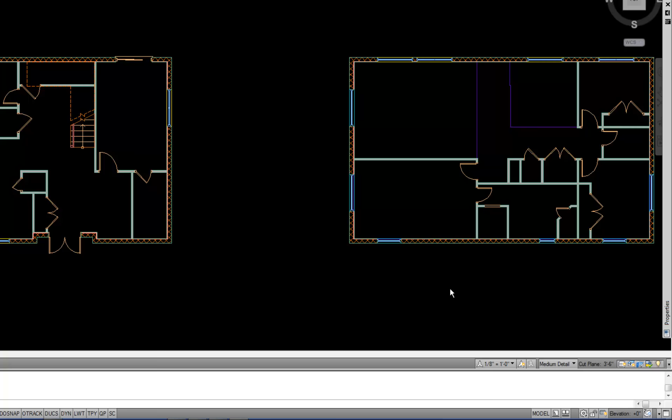You'll notice at your lower right that you have a button that says Medium Detail by default. It might say something else if you've changed that, and it will also depend on which file you're currently in. For example, if you have an older CAD file that was created in vanilla AutoCAD, and then you bring that into AutoCAD Architecture, then it's not going to say Medium Detail because those display configurations are not set up in that file. So if you're going to be using display configurations, it's always important to create your file using a template that was designed for AutoCAD Architecture from the start.

For example, when you look at your templates, you would normally want to use an AEC Model CTB or STB template when you're working in AutoCAD Architecture for a model file that you're going to use to draw your building in. If you have an older CAD file that you want to use display configurations with, you can create a new file in AutoCAD Architecture and then bring your objects into that through copy paste or the insert command, to bring your file up to the current template type.

When you hit your display configuration button, you'll notice that you have about 10 or a dozen choices of default display configurations that will help you get started. It's a great thing to use those as a starting point because you're not creating something from scratch. You don't have to reinvent the wheel. A lot of times these will do something close to what you already want.

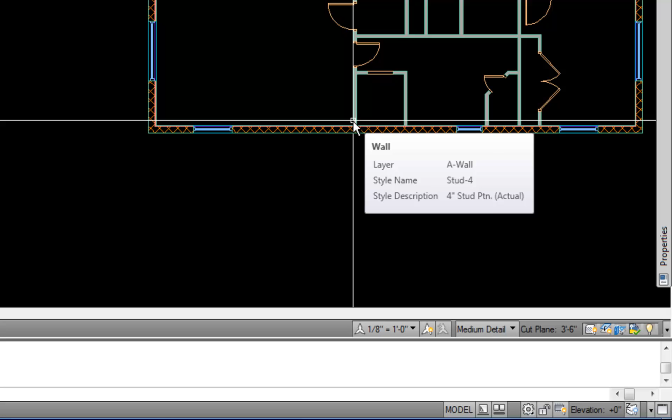The other thing that's important is immediately to the right of that button, your cut plane height, which indicates the height in the Z direction of where your floor plan view is being cut. So right now, the plan view that I'm looking at is cut 3'6" above the Z height of 0. So now let's talk about what display configurations are and how we customize them. Let me show you a quick example of what this will do if I change this setting, and that'll help you get the idea of what these are for.

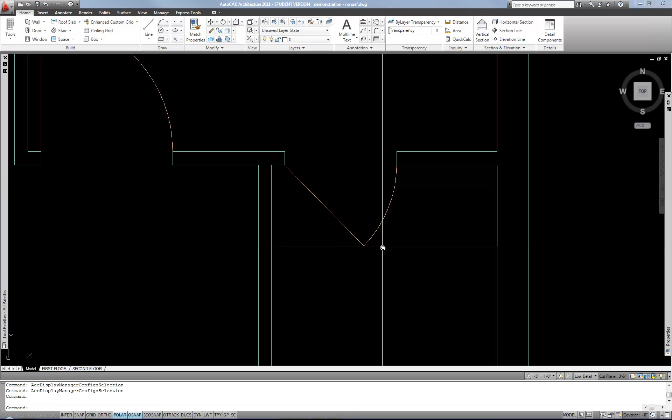If I change from medium detail to low detail, you'll notice that everything is shown in a more simple way. For example, I lose the hatch in the walls. I lose the multiple components. This used to be a block wall that had furring and gypsum board on it, but now it's only showing as two simple lines. So there's very little detail. The doors are very simple: just a single line and an arc for the swing. The stair is more simple. It doesn't show the railing except for that one line. So it simplifies the drawing to a much greater extent.

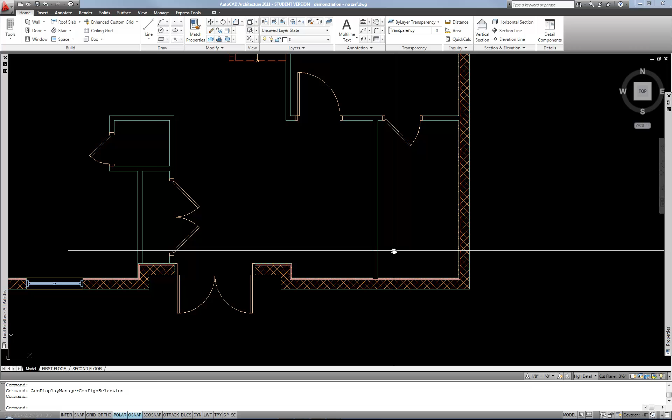Medium detail was where I was earlier. That's your normal. And then you also have high detail. When you're in high detail, you'll notice that it is showing more hatch patterns in the components of your wall, and the hatch within the walls is a smaller scale. I'm seeing more detail on the staircase. So that's customizing the display of your objects, and that's what the system is all about.

It allows you to take a three-dimensional model and extract different views like plans, sections, elevations, and other views from the model. So it really goes back to the whole concept of what building information modeling is all about. The challenge is, if you're going to use this to really dive into building information modeling 100%, then everything in your project has to be an AEC object or a multi-view block reference.

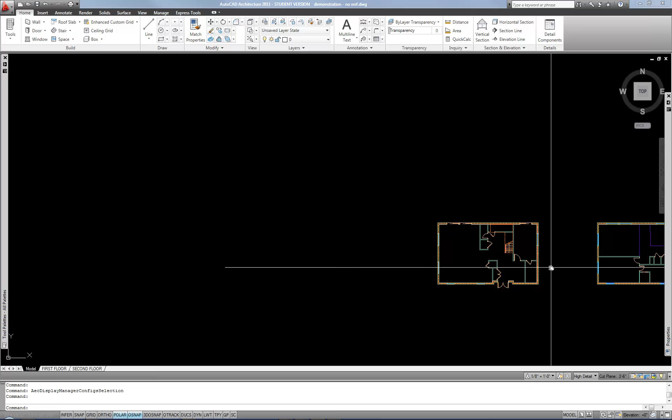So if I wanted to draw my kitchen counters here, I can't just draw lines. I mean, I could, and I could use them for my plans, but if I wanted to stack the two stories of this building one on top of the other, and then pull out the second floor plan and the first floor plan separately, like you really would want to do in BIM, then those lines are not going to turn on or off automatically through my display configuration.

So then I end up fiddling with layers and display configurations, or you're kind of just losing out on a lot of the benefit. So then you really dive into using AEC objects and multi-view block references 100% if you really want to use AutoCAD Architecture for BIM. It's not an easy thing to do it 100% all the way. And I'll get into that a little bit more in a few minutes.

Let me just flip through a couple more of these display configurations to show you kind of what they do. I'm going to go to presentation, and now it's showing kind of a medium level of detail, but it's showing a consistent hatch pattern throughout all the walls. And that's nice if you're doing a schematic design presentation because you don't want to be distracted by what is the construction of this wall versus that wall. You just want to show the layout of the rooms, the general space plan, and how the arrangement of the rooms is working. So presentation is kind of good for that purpose.

Then the next one we have is reflected, which is more for reflected ceiling plans. So you'll notice that it's turned off the doors. If I had a ceiling drawn, it would now be showing up. So that's what reflected is kind of intended to be for.

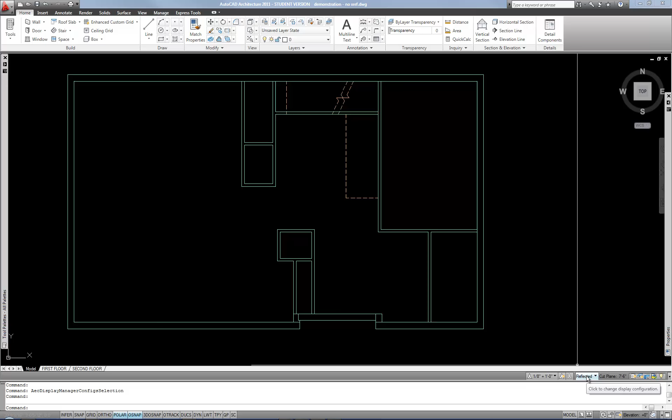You also have screened ones, which you'll notice will screen out or grayscale everything. So this would be great if you were doing maybe a mechanical engineering drawing of the HVAC system or something along those lines, and you wanted to emphasize certain things. Or you could do this for a life safety plan because you're trying to emphasize where the fire rated walls are, so you could have everything else screened except for fire rated walls and travel distances, fire extinguishers, exit signs, those types of things. So that's what this system is all about, is to automatically change the display of the AEC objects between different preset configurations. That's what the basic concept is.

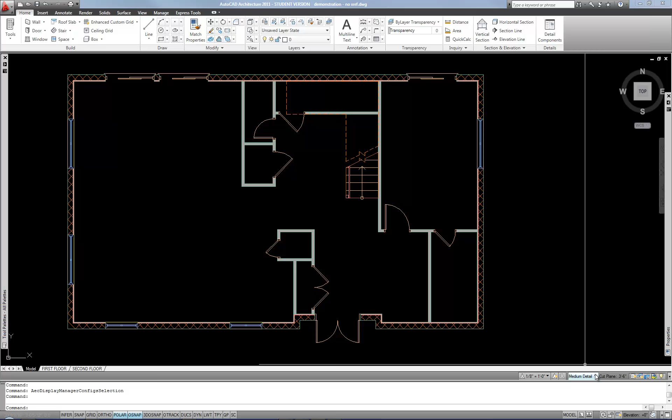So I'm going to go back to medium detail. That's always kind of my default one because I usually use that for floor plans. So now, how do we tweak some of the settings for those and talk about how those are made up? I'm going to go to the Manage tab on the ribbon, and then I have a Display Manager button on that tab, Display Manager. So this is where you get into the nitty-gritty details of how those configurations are being used, and I can tweak some settings now.

You'll notice when you're in the Display Manager that you have 3 folders on the left side that you can expand with the little pluses. So the first option is configurations, and those are simply the choices that you have down there on that button that I was just hitting. It's showing medium detail as bold because that's the currently applied configuration that I have in my drawing. If I click on that, on the right side here, you can see how it has top view, bottom view, left view, right view, etc.

Each of those is pulling a specific group of settings to apply based upon my view direction. So when I'm in the top view, which is my normal view for a floor plan, it's pulling the settings for what everything should look like from a display representation set called plan. Now when I'm in bottom view, it's pulling a different display representation set, and that's plan diagnostic. Left, right, front, and back are all using the same section elevation one, and then the default view direction, which means really anything other than that, like an isometric view, would pull the model display representation set. So there's 4 different representation sets that are being merged together into this one configuration.

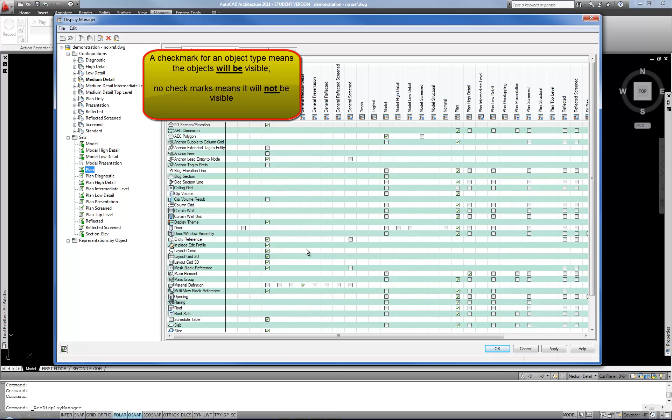So let's say I look at walls, there's one check there, and if I go up to the top, you can see that that says plan. So what that means is, for my walls, there's a display representation setting that has been set up for plan views, and then if you want them to be turned on, in other words visible, then that check needs to stay checked down there under plan and to the right of walls.

So the most important thing that you'll do here occasionally is turn something on or off. An example of that would be the ceiling grid. Remember earlier I said that there was the reflected display configuration, which is used for ceiling plans. So you'll notice when I look at the ceiling grid row, everything is not checked, because the ceiling grid would normally be turned off when I'm in medium detail, because medium detail would be

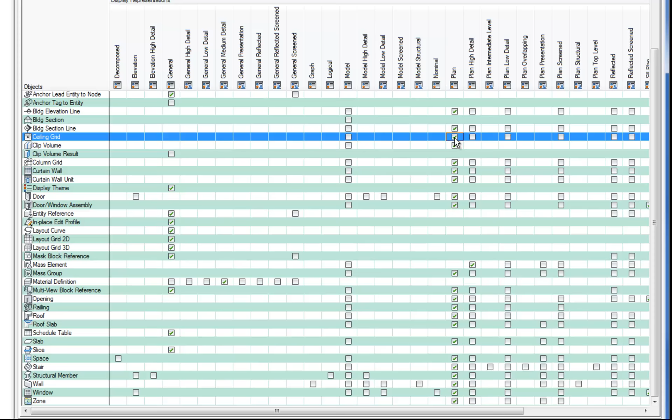more for floor plans. If I did not want to rely on my display configuration for getting a ceiling plan, then I would want the ceiling grid to actually be turned on when I'm in medium detail mode. So in that case, I could put a check there next to ceiling grid under plan, and that would turn on my ceiling grid so that I could work with a ceiling plan while I was still in medium detail mode.

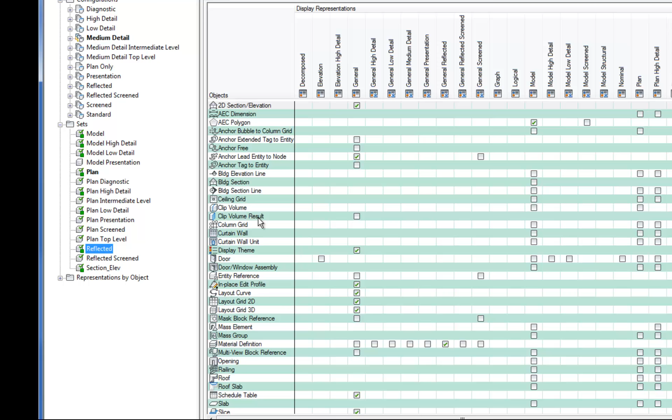Now, if I don't want to do that and I want to use it more the way that AutoCAD intends us to, then I can go down to Reflected on the display configuration, look at top view, and you can see that it's the reflected display representation set. So now I'm going to go down to Reflected under my sets and look at the ceiling grid again. As you go over to the right, you can see that there's a reflected setting that's checked. So that's going to turn the ceiling grid on when I'm in my reflected display configuration.

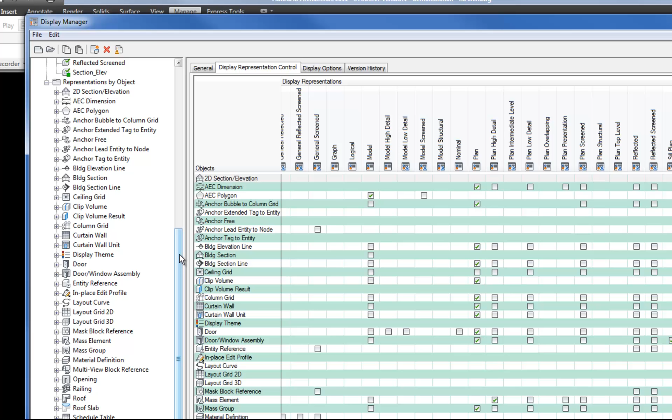So now let's look at the third section here on the left side. So we had configurations, which again is pulling one for each view angle, like top view. And then this is what it's actually pulling in terms of turning things on and off in terms of visibility. Now, what does that mean? So now I'm going to go to the object types, and that's the third level. So we're digging down into the deepest level of the hierarchy here.

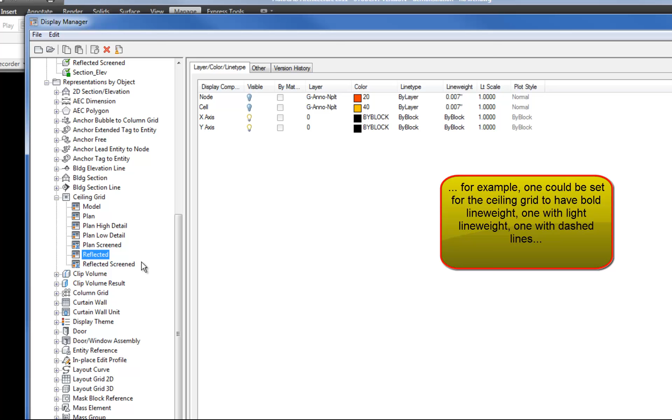So now if I go to ceiling grid and reflected, under ceiling grid there's looks like 7 different options for how the ceiling grid is going to be shown. That's what these are, the representations for each type of object. So under ceiling grid I have model, plan, plan high detail, low detail, plan screened, reflected, and reflected screened. Those are just different options for how the ceiling grid could show up. And then I could tweak each one of those a little differently if I wanted.

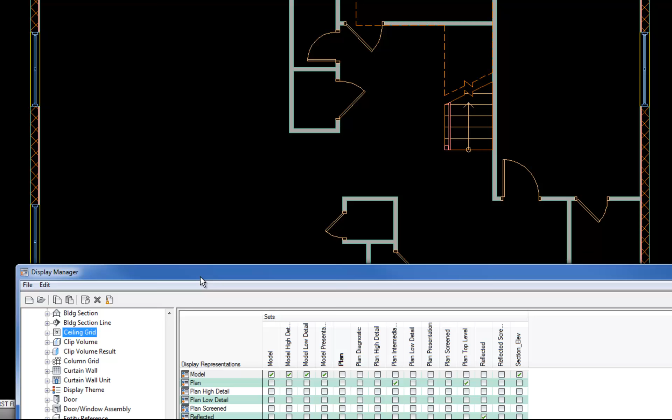So let me show you some examples so that this will be a little bit easier to understand. Let me go back down to the walls here under my objects. Remember when I changed the display configuration to presentation, it made all the walls a solid orange hatch. So let me show you where that's coming from. If I go back up to my presentation configuration, I can see when I'm in top view, it's using the plan presentation display representation set.

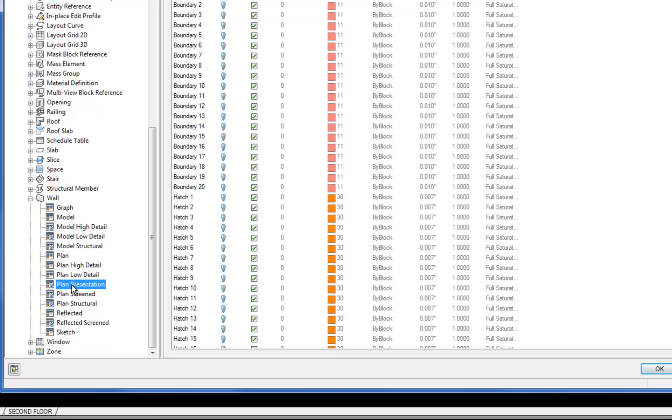So now I'm going to go down to the bottom, my plan presentation representation of the wall. When I select that on the right side, this is my graphical control for how the walls would look when I'm in that presentation display configuration. I have the hatching tab, and you can see there's a shrink wrap hatch solid pattern being applied. So that's why it was solid orange. And the color part is coming from here on the layer color line type tab, shrink wrap hatch on or off, and then you have your layer options, color options, line type options, line weight options, etc.

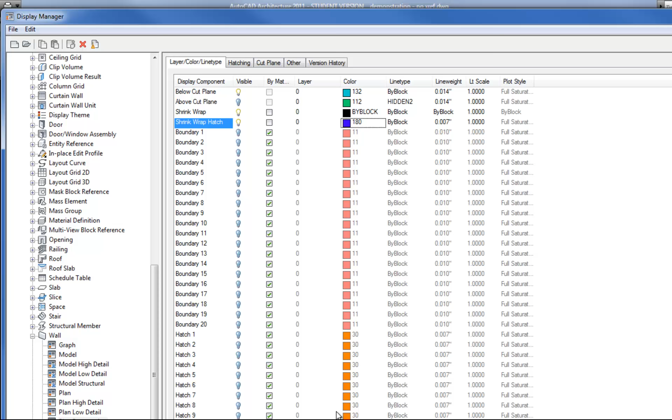So if I decided I really hated the orange and I wanted to change the color, I could make it a blue here and hit OK. And then when I hit OK again and go back to presentation mode, now I have it as blue instead of orange. So back to the display manager.

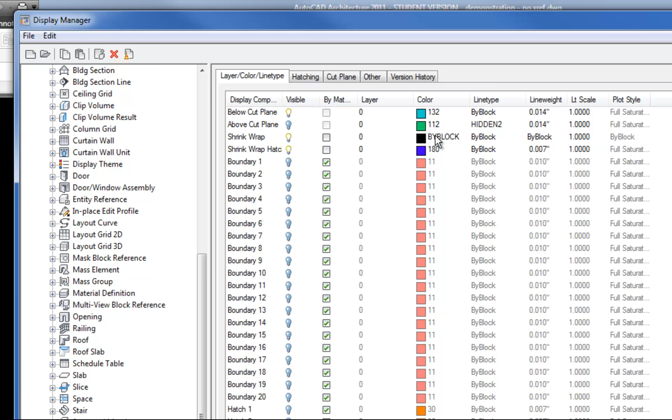So just to kind of show you how I got there again, I expanded configurations. I went to presentation to check and see which representation set gets applied in top view when I'm in presentation configuration, and that is plan presentation. And then in my objects, I went down to walls, and then I go to plan presentation, and then there's all of my graphical control. So I could change the color or the line weight or the hatching or whatever else I wanted to do.

So let's look at another example. Another one was the screened version, and I use it as an example of if you're doing a different type of drawing, like an engineer's drawing where you wanted everything to be very light. So if I go to my screened configuration, you can see that the representation set that's being applied is plan screened. So now I'll go back down to my walls and look at plan screened, and then the layer color line type tab.

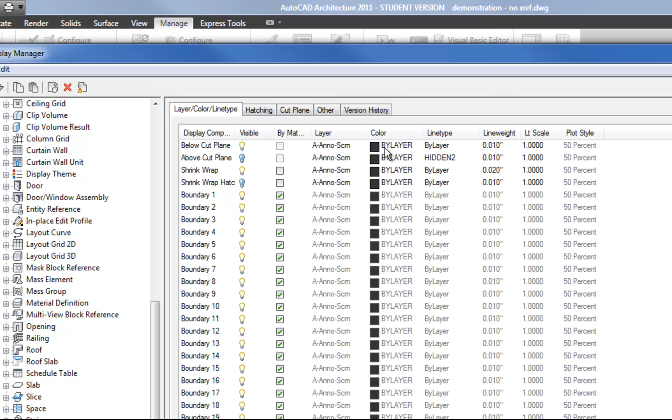So here's where you can see everything is set on this specific layer, A-Anno-Screen, and then the color is by layer. The line weight is all set to a hard specific number. So as long as the layer is A-Anno-Screen and the color is by layer, then everything is going to be that kind of dark gray, almost black, and that's being pulled from the layer manager because it's set to by layer for the color. So I'm going to hit OK and then go to my layer manager because it's by layer.

So here's that A-Anno-Screen layer, and you can see it's color 250. So maybe that was just really hard for me to see. So let me raise that to 252. Keep in mind this might change how it prints depending on what type of plot style table I'm using, but I just wanted to make it something that was easier to see on the screen so you could see another example of how this is working.

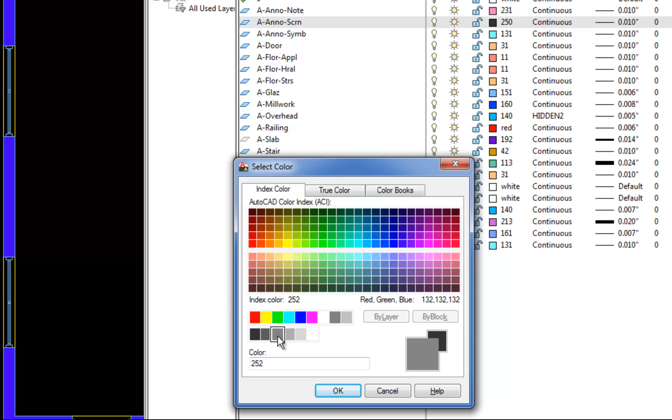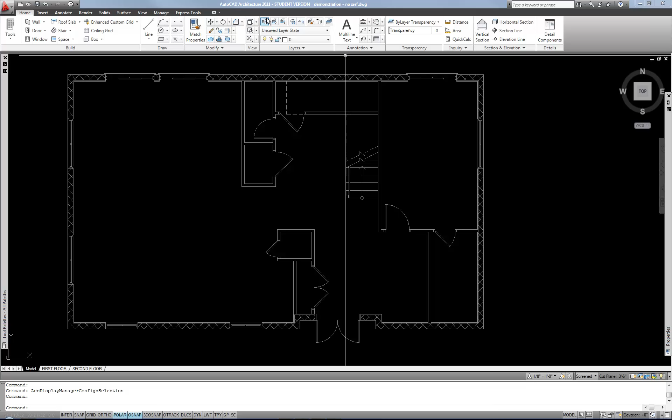So I'm changing that layer's color to 252, and then I'll close out and go back to screened. Now you can see that that gray is much easier to see. It's not so dark black anymore. So that's the basic idea of how that's working. So you can use that to control the graphics of your AEC objects or multi-view blocks, and you can use it to control the visibility of those objects.

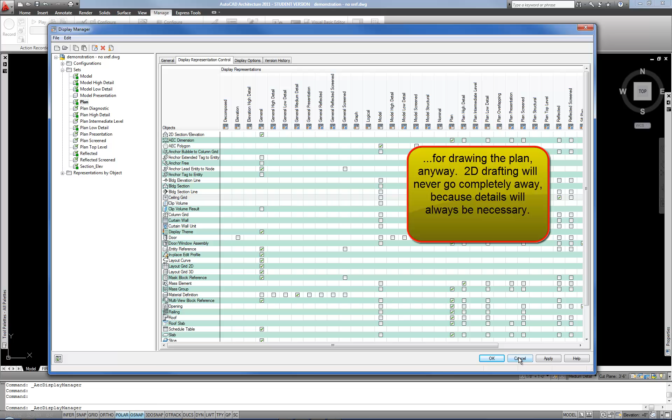So you'll notice that all these objects are your AEC objects that are going to respond to the display configuration. So just to reiterate, because it's very important, non-intelligent, non-AEC objects won't respond to these settings at all. Lines, arcs, circles, things like that will not work. And that's why companies that use AutoCAD Architecture for BIM have to go out of their way to use only the AEC objects, and that includes things like even shelving and cabinetry.

So if you're going to be using this type of system, then you would make sure you use your Design Center objects as much as you can and stay on the AEC content tab, because these are multi-view block references, so when you bring them in they will respond to the display configuration. So these are the types of furniture blocks that you would use on the AEC content tab and not on the folders tab. It is possible to make your own custom multi-view block references that do respond to the display configuration. That will have to be a separate video.

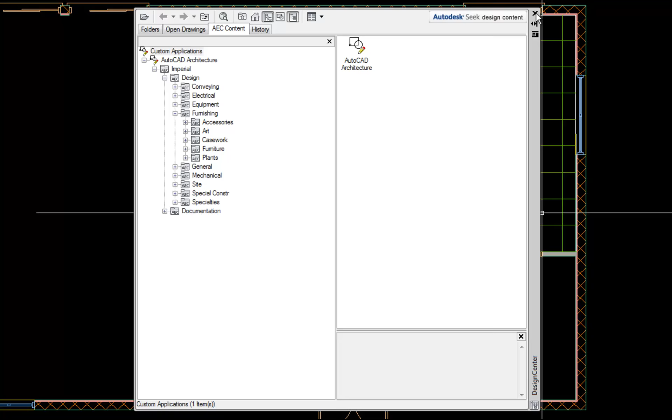The next important item that I want to talk about is the cut plane. Remember that was showing down there at 3'6". When I'm looking at my display manager settings for the configuration, if I select medium detail, you have the cut plane tab, and that's where the cut height is actually set for this display configuration. So that's important to keep in mind. A lot of times people will put, let's say, a high window, like a clerestory window, and it won't show in the plan. Well, that's kind of normal because it's probably above 3'6".

So it's taken a literal section at 3'6" above your zero height, and then anything below that will show, or at that height that's being cut through. Anything above that, like a clerestory window, will not show up. So you can adjust the cut plane if you wanted.

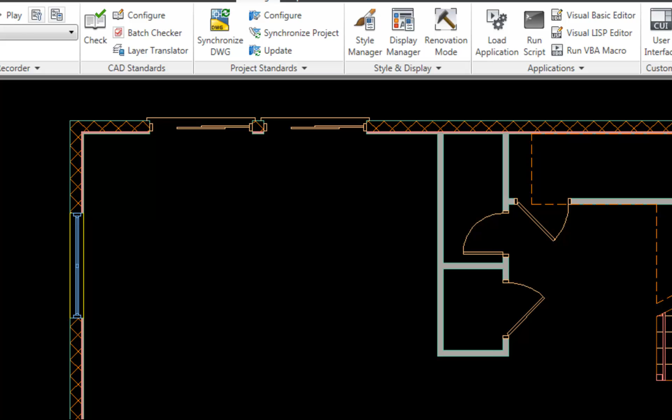A lot of times what you end up doing is making a couple different display configurations that have different heights set. And that's kind of what this medium detail, intermediate level, and top level are here for, so that you can adjust your cut plane height. So I could set this one up at 10 feet high or 12 feet high, and then do the top level at 20 feet or something like that, so that the cut planes will correspond to each level of the project.

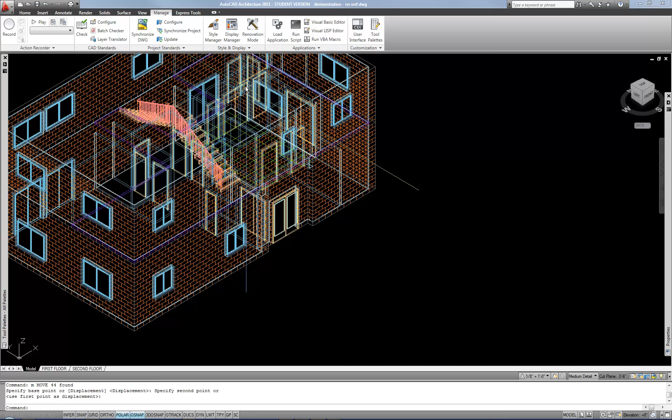So if I did that, that would allow me to literally stack my second floor on top of the first floor. So I'm going to go ahead and move that second floor to be on top of the first floor by doing a move command and using my O-snaps in the corner of the building. So now it's literally stacked like the real BIM model would be. And then I'm going to go back to my top view. So now I only see the first floor, although I do see the edge of the slab above as dashed.

And this is an opening that doesn't have the right settings set, so that apparently needs to get fixed. That should not be showing, obviously. So if I wanted to switch to the intermediate level, then that would theoretically show my second floor. It's not working now because the heights are all set at 3'6". So let's go and fix that.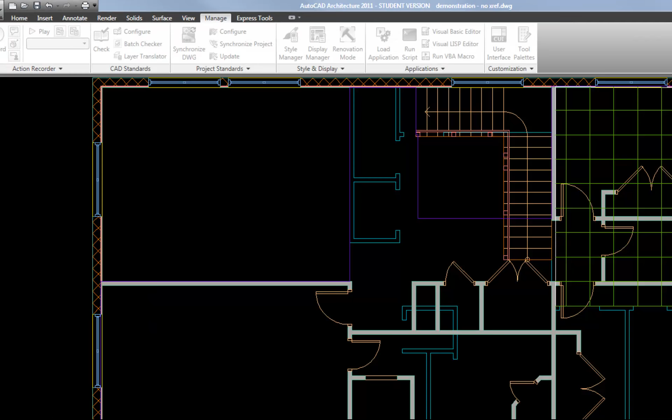So I'm going to go back to my display manager and go to my intermediate level. And my first floor walls are 12 feet high. So I'm going to set this to 15'6" because then that will give me 3'6" above the second floor. So now I can hit OK. And now you can see how that is showing the second floor objects.

It's also showing objects that are underneath that down on the first floor because you're looking through the second and the first floor altogether. If I wanted to fix this so that the first floor walls were not visible when I do my second floor, there's a few ways I could do that. One way would be to look at how the wall style is set up, and I would say wall style because in this case there's a style override. If you don't have a style override, then you would edit this in the overall display setup under the bottom category of objects.

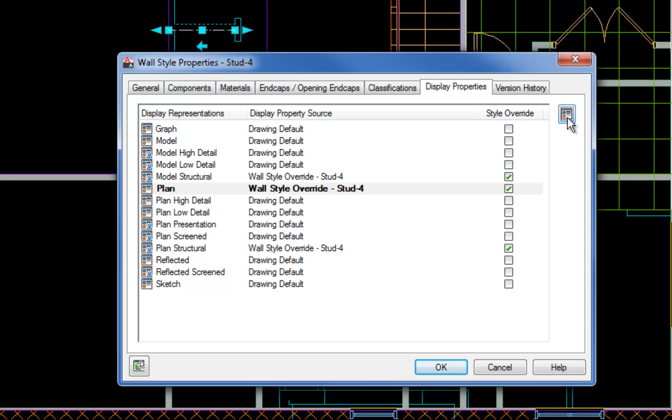Now I can look at my properties here, and you have below cut plane on or off with the light bulb. So now I can hit OK and OK, and then those have gone away. This one's still visible because that's a different style. So again, depends on whether or not you have style overrides applied. A lot of times you do.

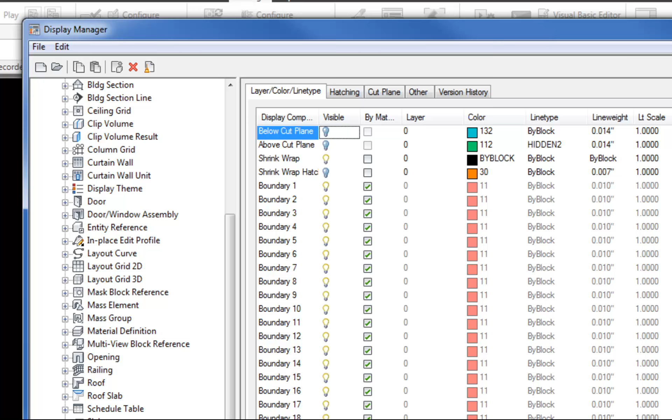The other option though, if you don't, is go by objects, and then I can go down to walls in plan, and then uncheck this for below cut plane. So that's if you do not have style overrides applied in terms of the graphics and display properties. So now I can hit OK. This one does have style overrides applied, so I do need to go and edit that wall style as well.

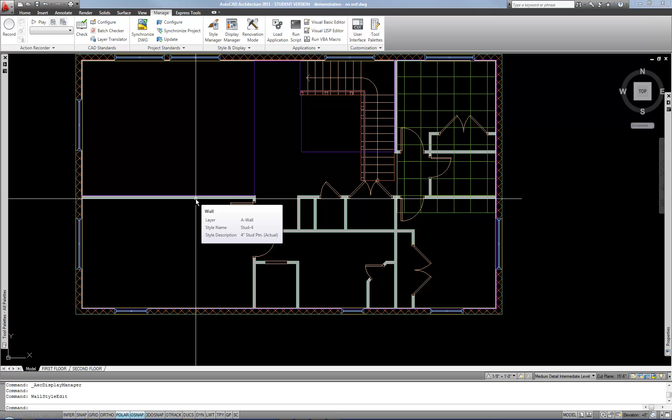You can see why having a template makes this a lot easier. It's because then ideally you get this set up one time in one place, and then you don't have to always be going and changing these small settings. Now my next important comment about understanding how this process works is really just to clarify in case you change the wrong setting. If you're in the style editor and in display properties, you have a cut plane tab there, and you have the option to override the display configuration's cut plane. So you have to be cautious.

If you check this, it's going to ignore if you have specifically set a cut plane different than 3'6" in your display configuration. It's not very often that you would want to do this, so you just leave this unchecked most of the time, and then that lets the overall cut plane height decide how the graphics work in terms of the walls and doors and things like that. Just want to throw that out as a common error or question that comes up from time to time.